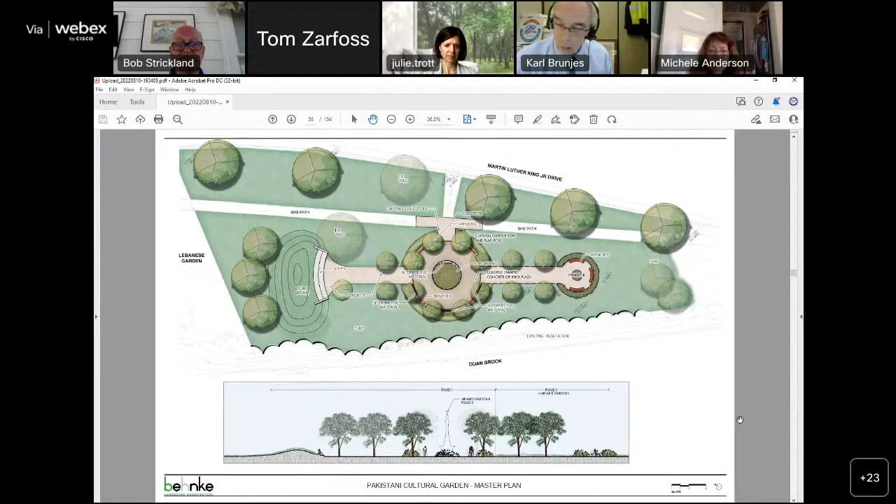That central plaza, the planting area in the center of it, is eventually the pedestal for a replica of the Minar-e-Pakistan, which we showed you last time. We're not prepared to do that at this time, but hopefully that will come in the future. Next slide.

That's just a quick look at the area of the garden. There's relatively little we have to do in the way of site preparation. As I noted, we're not taking out a lot of vegetation. One more. Okay, next slide.

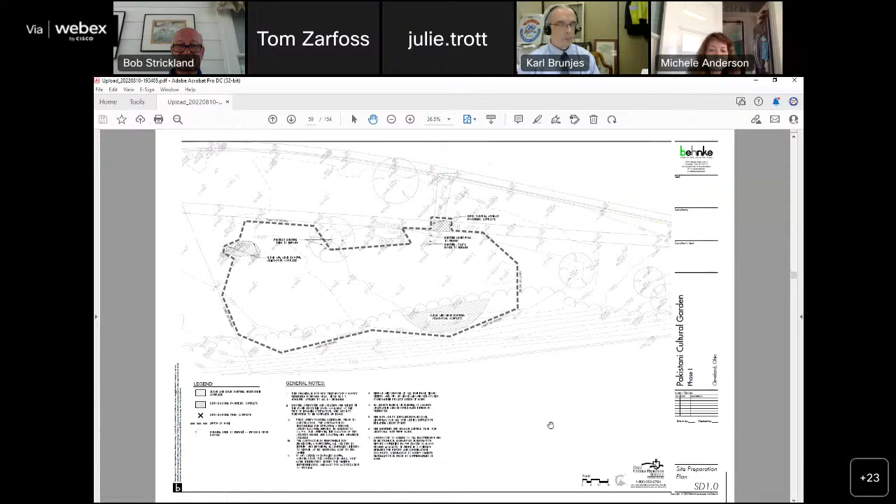That's our phase 1 program, the central plaza and the area that goes to the left, or the south, to the small amphitheater. The future site for the Minar will, in the short term, be a planting bed.

The plaza itself is concrete, two types of concrete. The star you see is again a replica of the setting for the Minar in Pakistan. That's going to be a colored stamped concrete. The remaining concrete will not be colored. It'll be scored on a 2-foot pattern and etched to expose a little bit of aggregate to give it an interesting surface. You can see there are some benches included around the plaza, and some interpretive materials which I'll show you in a second.

Next slide. The grading plan is not something that is much of a deal here. This is a flat site. It all slopes very slightly toward the brook. We're not putting in enough pavement that we're going to have a runoff issue. We have enough of a buffer between ourselves and the brook that it's not an issue.

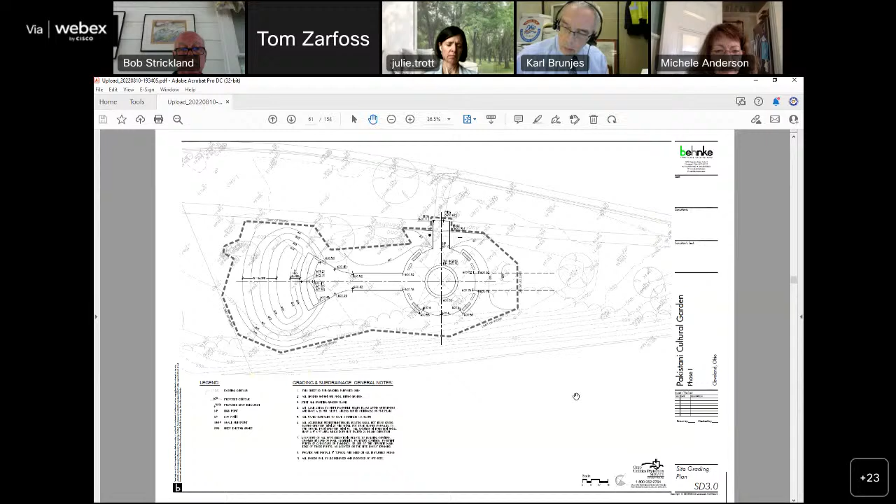I do want to call your attention to our entry. There'll be a garden sign and a flagpole. Those are provided by the Holden Parks Trust. Next slide.

Planting plan. Trying to keep this reasonably simple in that we don't want to create a big maintenance issue. As you probably know, the city's responsibility for maintenance is mowing the grass. That's it. The rest of the maintenance is the responsibility of the garden and their committee and the folks that assist with the work. So we're trying to keep this attractive but reasonably simple. There unfortunately have been some problems with plant stealing in the cultural gardens that we're going to have to try to deal with.

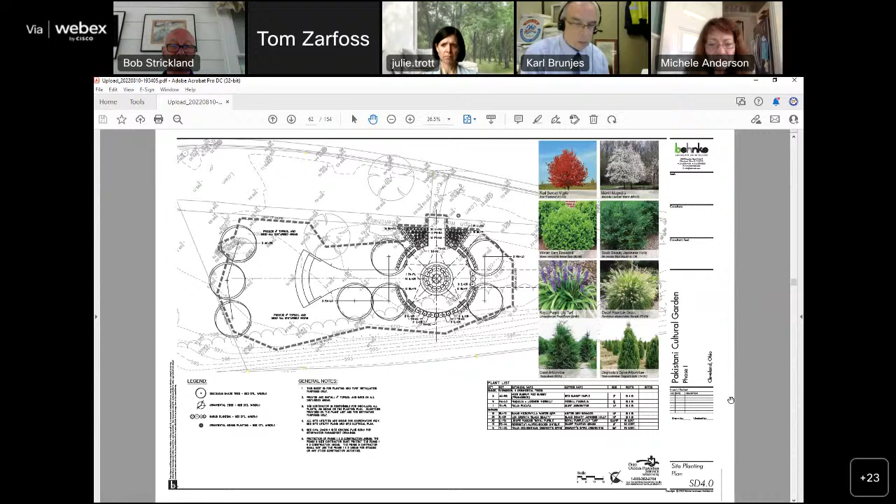So it's simple material, attractive material. Next slide. Construction details. The lower left-hand corner is that future pedestal for the Minar. In the interim, that'll be a seat wall with some planting behind it, and then eventually we'll put a concrete cap on that and install the Minar. Next slide.

That's a sample of the type of pavement we want to use for the star. We're still looking at colors, but it'll probably be something in that range. Next, please.

The same artist we're using for the Minar, we're going to use for our interpretive materials. The Minar will be stainless steel. These are stainless steel with, as you can see, some artwork on it reflective of the culture of Pakistan. There'll be 4 of these. Each will have a separate topic. They will also have a QR code, to use some of the technology that almost everybody has available to them these days, and not try to write long dissertations on interpretive material. Keep it simple, give people the general idea, and people that are interested can easily find a lot more information. Next slide.

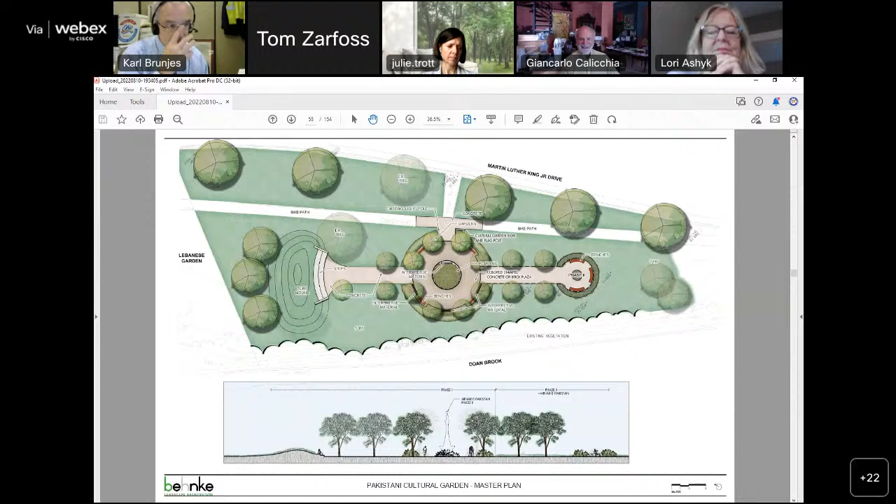Okay, and then what about some trees, some distinctive elements that make this a recognizable Pakistani garden? Well, I don't think any Americans would recognize a Pakistani tree, to be honest, and mulberries are not something I'd want to incorporate. Again, I think we have to use our interpretive material creatively and instructionally to tell people about the country that way. We just did a Colombian garden master plan, and we had some of the same issues there—you have to recognize that some things you just can't transport and have them be meaningful to people.

And that plant material also is just not available. But it is—I have it here in my garden, and I purchased it from nurseries in Oregon, California, and Washington. I can suggest something. What is it you have? Tell me. I have a Pakistani mulberry tree, which is one of the most beautiful plants in the world. Okay, well, we can look into that. We could always change a tree or two.

That's not a problem, but to me it's like we need to distinguish them from others. You mentioned the Colombian garden—I have the same issues with that. I like to see something that identifies these beautiful gardens for the culture they represent and come from, so that when Pakistanis have events in this garden, they see it as an extension of their home and environment, what they left behind and what they're creating for America and the people in Cleveland. That's especially important since this community of cultural gardens in Cleveland has become world famous.

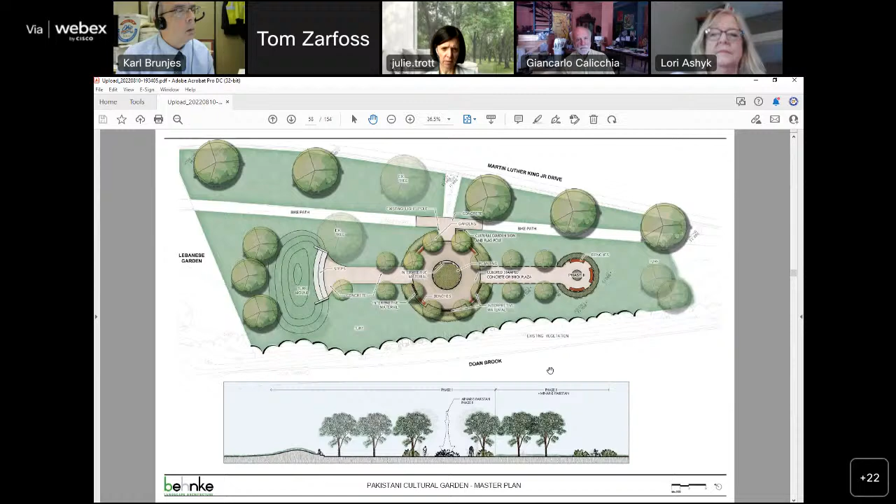Just a quick design question, Mr. Zarfoss. In the colored drawing, it looks like your benches are on the same concrete material as the center circle, where in the more detailed drawings it steps around the benches and interpretive materials. Which direction are you going? The construction drawing, if you go down a couple more, right there, that's the direction we're going.

My only comment would be that it might make sense to complete the right-hand side of the outer circle, so you don't have the little bite in that area, since you're not fully aware of when phase two would go forward. I think that might look a bit more complete, in my opinion. Or change the edging around the two right extensions of the concrete around the bench and interpretive sign, so it feels similar to your color drawing.

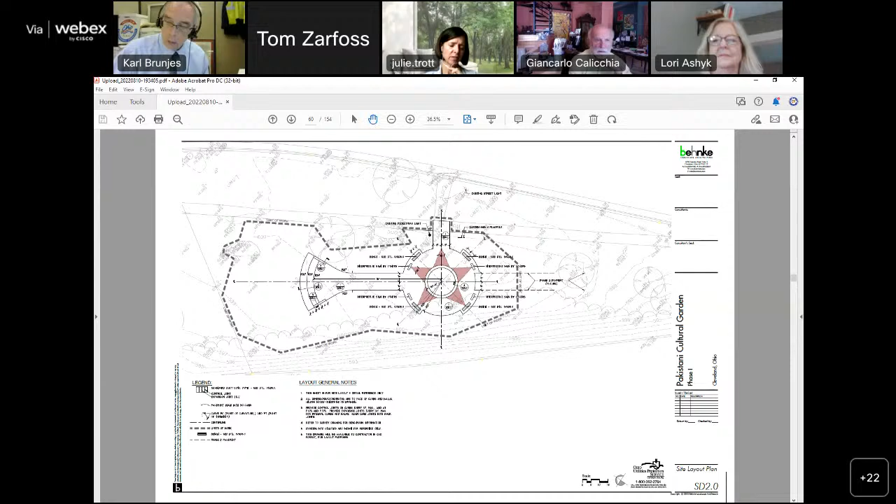I would ask for some consideration, obviously this takes a lot of fundraising, but to consider in your phase two—remind me of the bench material, I'm sorry I missed that when you presented earlier. The bench material, go to the last picture, that's the bench. Oops, I'm zoomed in, that's probably why. There, that's the bench.

Could this be an opportunity to incorporate some of that indigenous marble in a delicate way? It would probably need to be a backless bench, but providing something within the space that, if somebody saw the marble, they would connect to, based on it being something from that region. Even a stone bench, made out of marble, so that people could connect to that. We could take a look at that.

I was trying to do something a little more comfortable than a stone or concrete bench. But yeah, we could take a look. People have been sitting on stone benches for a million years. Yeah, oh, I know they have. Yeah.

So I would recommend considering that for your phase two so it does provide that connection to the location. If we could get marble or indigenous stone within our budget for that little amphitheater, which is concrete steps, it would be quite nice to have that be upgraded.

I can recommend a few of them, and you can get one of your Pakistani associates to donate it. It could be an extension of the budget instead of a part of the budget. I will raise that point. Hey Giancarlo, maybe you can have an offline conversation with Mr. Zarfoss with some recommendations of who we should talk to, since you do have some amazing connections. Yes, thank you. Thank you.

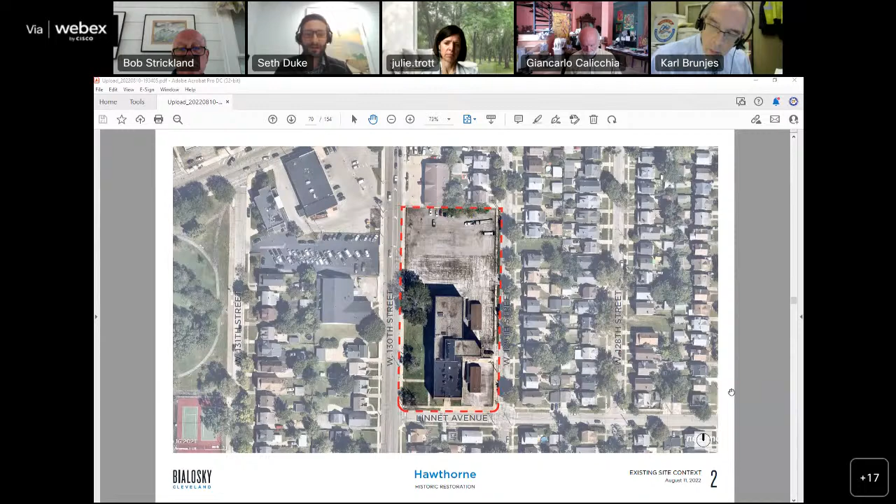Let's go to the next slide. Just a little bit of site context. From Lorain Avenue, it's just a couple blocks away, very car oriented, coming up West 130th to Lorain, mostly commercial, a lot of parking. And then on the next slide, you can see that Jefferson Park, as I mentioned, is just a few blocks away. So while we will have some outdoor space on site that's open to the public and available for residents, really there's this larger park for more active uses such as tennis or playgrounds, etc., compared to what we have on our site.

Next slide. And then this is just the front elevation, existing conditions. I did want to point out that we took a recent site walk with our historic consultant and a restoration contractor to evaluate all the masonry and stone. It's in remarkably good shape, so we'll have very minimal repairs to do. There are some critical areas, but overall just some tuck pointing and cleaning for the most part.

One thing to point out that you'll see in the drawings is the gray box on the left. That is an existing entrance that we'll be reusing as our new accessible point of entry. The one real change we're making to the fenestration is the very small windows at the bottom level in the center, which we are widening to match the proportions of the windows above. We'll be retaining the stone headers and working through that with our structural engineer, and the National Park Service is aware that we are changing those openings.

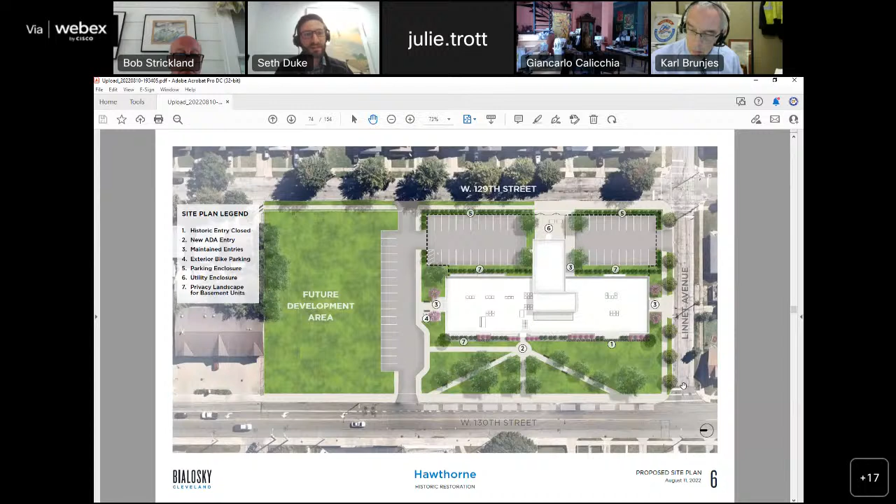One thing that's not shown in the site plan that I would point out is that we had a comment from the local design review and we're working on revising it: creating where number 6 is, the utility area, making that a little bit smaller and providing a pedestrian connection between both parking lots so that regardless of which parking lot you're in as a resident, you have direct access to the building without having to leave the secure lot and go to another entrance. So you'll be able to use that east entrance stairwell at the southeast parking lot, even if you're parked at the northeast parking lot.

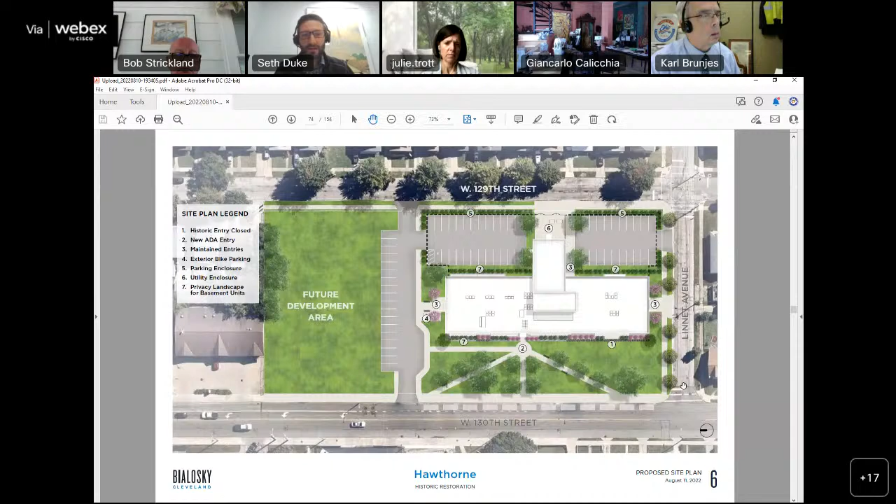Let's go to the next slide for a bit more detail on landscaping. This is our preliminary plan from our landscape architect. The base approach adds plenty of shade trees in the front lawn so people can use it as a relaxing lawn area for picnics, frisbee, and just enjoying the space. Then there's more dense shrubbery in front of the building and between the parking and the building to provide privacy and a buffer, while still allowing light and air into the lower level windows in particular.

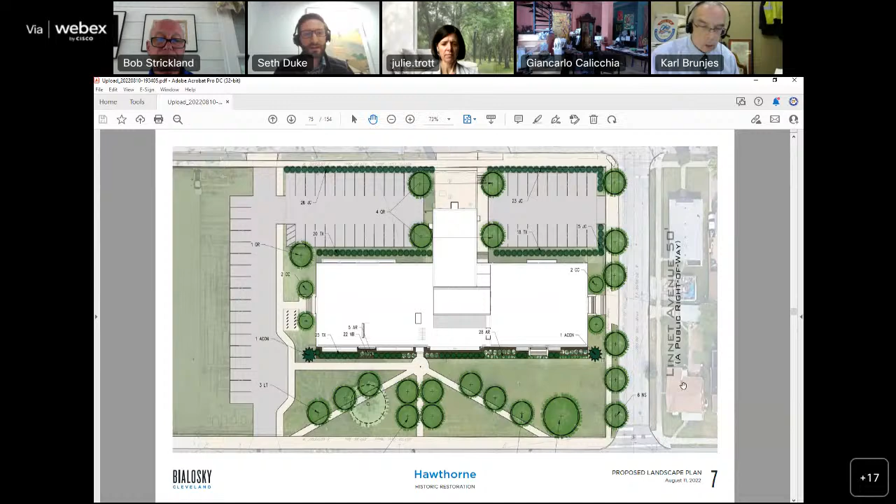We did have some comments from design review from the city's landscape architect about species, but our landscape architect is aware of those and believes the specific species of plants are adequate and appropriate for the site. You can see those species on the next slide. We have a number of trees, both on the front lawn and at the entrances, including some new tree lawn trees.

And then some denser shrubbery around the building to provide that privacy screening. If we go to the next slide, we added these next couple slides to provide a little more clarity on the entrances to the building and the circulation. It's a little bit of an odd building from an elevation and grading standpoint.

The building doesn't really have a direct entrance to any of the floors aside from the new one we're creating on West 130th. All of the stairwells come in at a midpoint between the lower level and the first floor, so you have to go up or down regardless of where you are. Being a school building, it had a number of entrances well beyond what is adequate and necessary for the new residential use.

So we're maintaining all of the entrances of the stairwells. We are maintaining and improving the entrance off West 130th for accessibility. And we're maintaining a rear entrance from the parking and utility area that goes directly into the utility space in the basement. There are three entrances that we are no longer using.

One, in fact, has already been closed up many years ago, filled in with a concrete floor. That's the one on the east elevation at the south end of the building. Then there's another entrance from the southeast parking lot to the east wing that went directly into the auditorium on the first floor, and that is now one large unit.

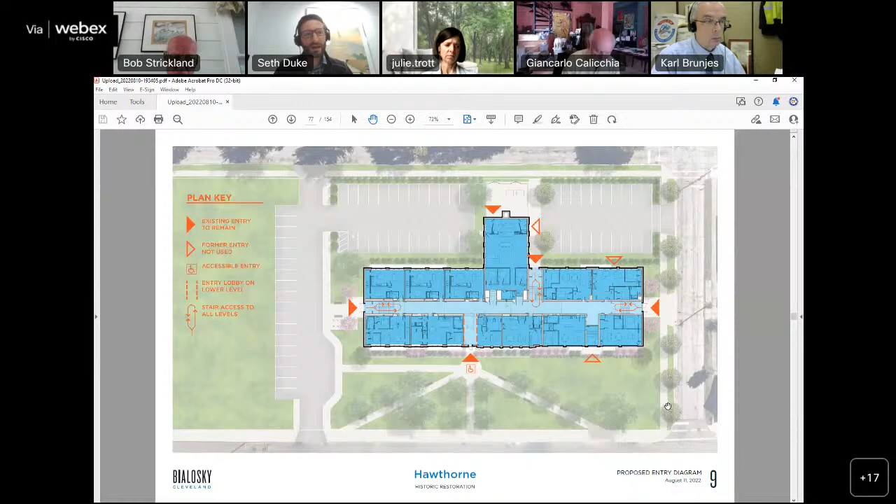If we go to the next image, it's more of what I just talked about, but it shows a little bit of that split level access. You can come in any of the stairwells to get to any of the floors, including, if you have the penthouse unit, you'll see in the floor plans you can come in off that rear stairwell.

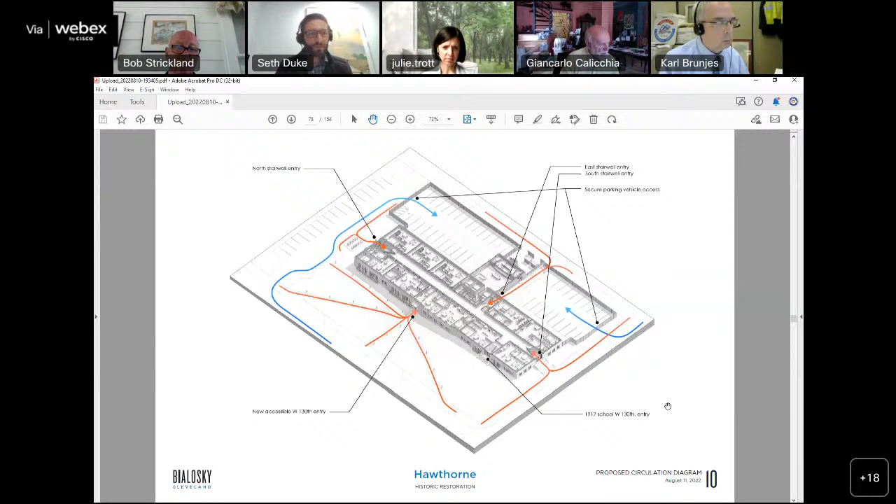If you are a visitor to the site, we're really directing you via the landscaping and sidewalks to that new accessible entrance, which will have a canopy and landscaping, and through color of the fenestration, which we'll see in some of the illustrated views, that is the primary entrance on West 130th. Automobile traffic will have access to those two secure lots, either via Linnet on the south or the new drive on the north side of the building.

And I think we just have our floor plans. Won't linger on these too much. I believe we covered them in some detail last time, but as a general approach to the building, we're preserving many of the historic finishes on the interior.

So hardwood floors in the classrooms, tile corridors, plaster ceilings, plaster walls in most cases. Chalkboards on the walls are being maintained. In most cases we're leaving them completely exposed, and in other cases, due to plumbing and electrical, we'll be furring over them, but they will still be there in case a future owner wants to bring them back. On the basement, we have our accessible entrance, as I mentioned, and then some utility space in the central area.

Going up to the first floor, which is the next slide, is that auditorium I mentioned, a large space with a stage area that will have the kitchen for the unit. Directly adjacent is that bathroom I mentioned, which is why we're closing off access to that door. But we'll still have the three main stairwell entrances for direct access to the first floor.

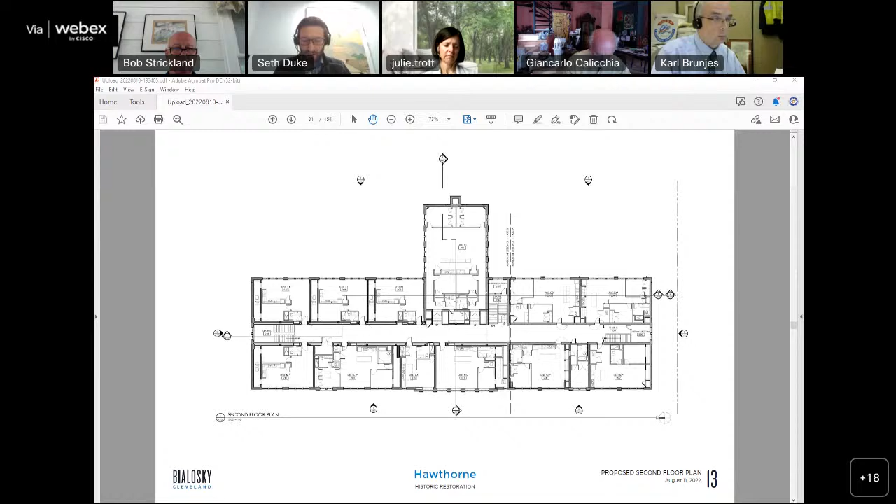And then I believe we have our elevations next. I'll go through the penthouse first, my apologies. So we do have a penthouse unit, with direct access via the east stair. That'll be a small two-bedroom unit. We're rebuilding the windows, fixing the masonry sills. There are a couple of mechanical louvers on the rear that will be changing to window openings to provide some additional light. And then there'll be a private deck with some combination of planters and railings to prevent access to the rest of the roof from that patio.

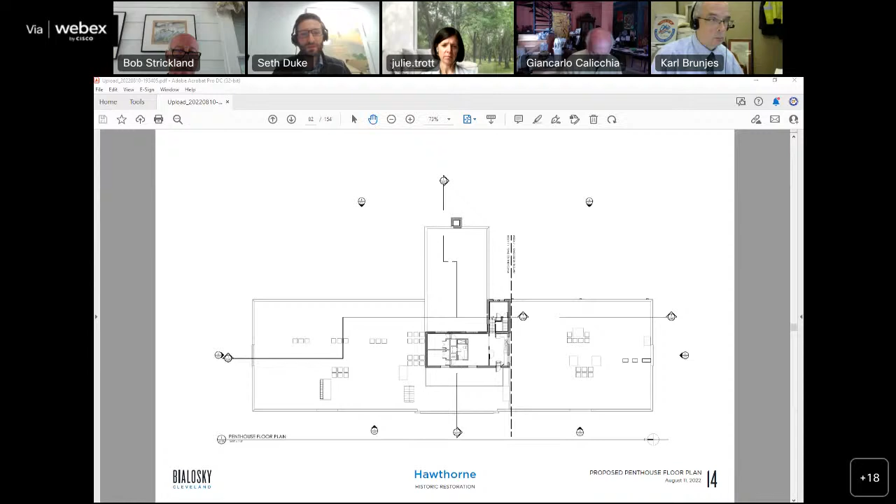And then on the elevations, I can run through these relatively quickly so that we can go to the rendered elevations. If we go to the next image, as I mentioned, masonry and stone are in great shape. We have a little bit of repairs at the entrances where the stone has been weathered and damaged over the years, so we'll be patching those in, doing some Dutchman repairs for some bigger openings before we put in the new entrances. But we are restoring the windows based on the historic drawings and existing conditions we have on site, and bringing back the transoms above the entrances to match the historic configurations.

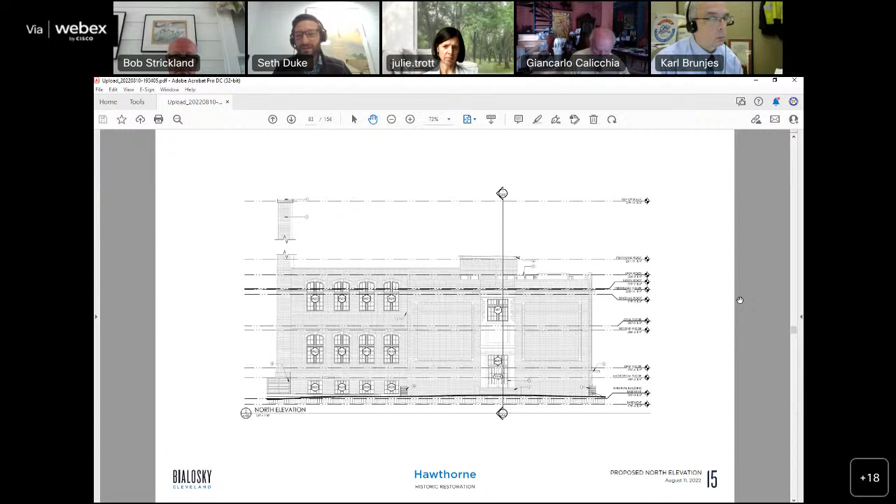If we go through, I believe the next is the south elevation. You can see it's very similar. You can see that door that leads directly to the auditorium on the right. That'll be behind the secured parking, so even though we're fixing it shut, it's also not something that's going to be visible to the public right away necessarily. It'll be in that secured parking area.

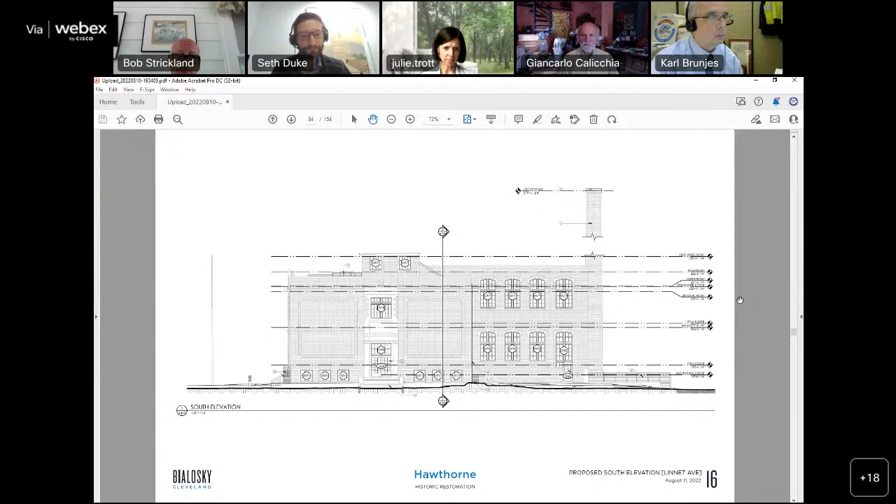And if we continue around the building, on the rear we have those light wells that'll have some guards around them for fall protection. We're likely rebuilding most of those based on the conditions, but we'll be able to reuse the stone caps for those light wells, as those have maintained their condition very well. And then that door in the rear that goes to the utility area. Thanks, Don.

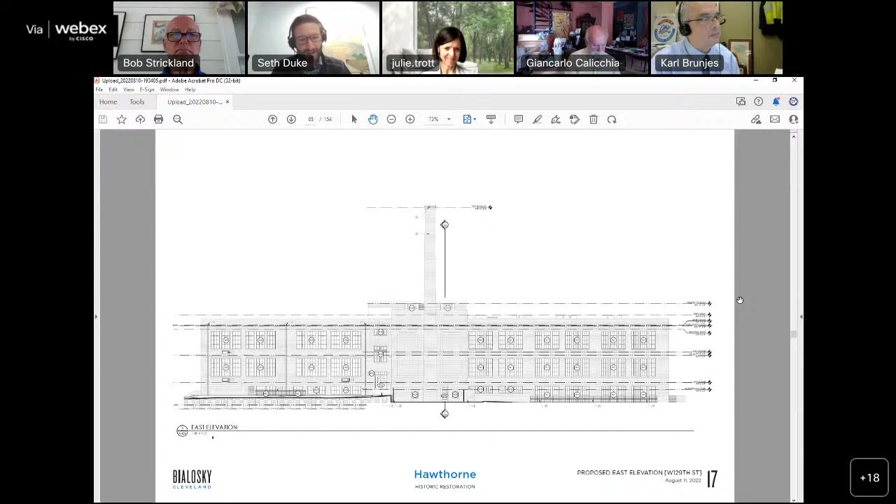And then the front elevation on the next slide, there we go. You can see the accessible entrance on the left. We have a blow up of that in just a couple slides. The former entrance we're basically treating as a large window on the right; the doors will be opaque. There'll be a painted drywall partition behind, and then the transom will remain open to provide additional natural light to the unit beyond. Due to the floor levels and the split level nature, that transom will be up high, so you won't really see into the unit—it'll be up near the ceiling, providing light while still providing privacy.

And then there are those windows at the center that we're widening for the basement units.

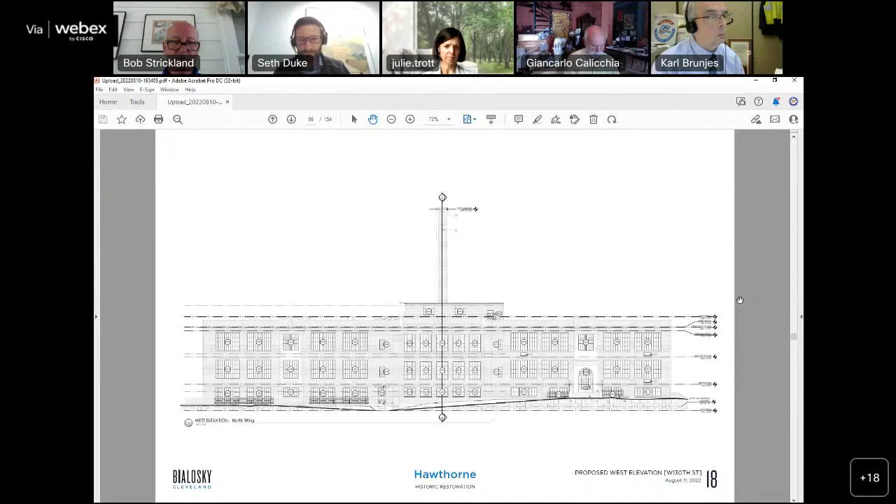On the next slide we have these rendered so you can get an idea of what we're doing. There'll be guardrails in front of the light wells, and shrubs that provide some additional privacy in front of those.

For the windows, we're looking at a color to really lean into the existing stone on the building, which I believe we have a swatch for later. We're looking at physical samples now to really get that color dialed in.

The operable entrances, the accessible entrance and the doors to the stairwell, will be a bronze color, with the transoms above also bronze, providing a visual cue that this is the way in and out of the building. There's one on each facade, so there aren't competing entrances, and it's very clear which one to use. The door we're fixing shut on the right will be the same color as the windows, a subliminal visual cue distinguishing windows from doors to help guide people in and out.

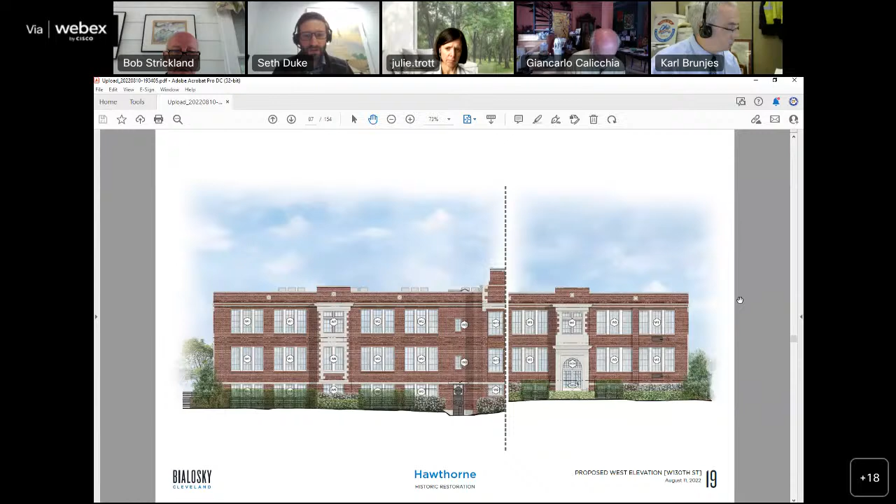Next we have an enlarged blow-up of both entrances. There'll be a canopy above the new accessible entrance with an integral light, so you won't see the fixture, plus site lighting with bollards along the path and poles at the parking lot. Landscaping will guide you to that entrance, while the other door continues the landscaping in front of the stone steps, keeping the colors consistent with the windows.

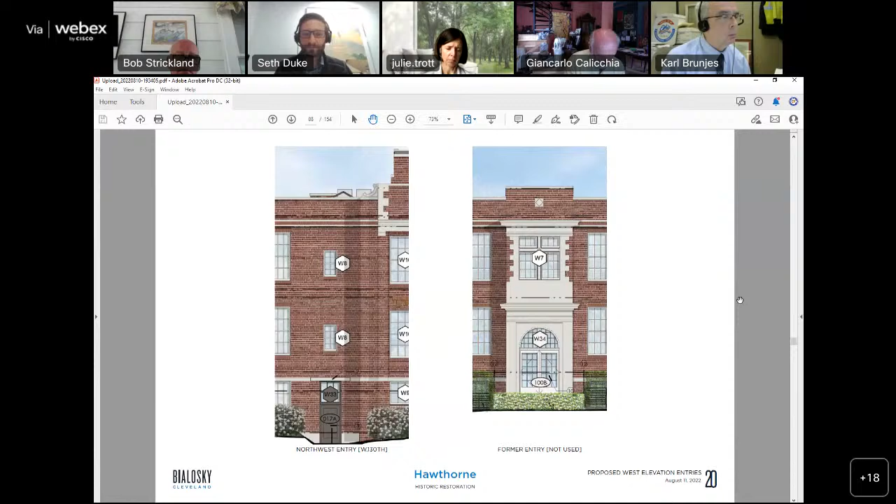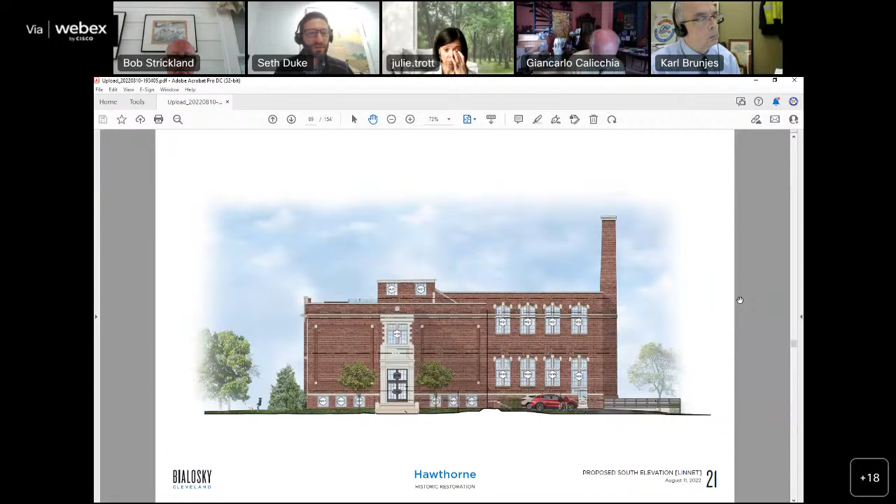The next slides show rendered elevations of the other facades, similar to the front: bronze color for the active entrances, and matching window color for the door that formerly went into the auditorium. Then there's an enlargement of those entrances on the other side, followed by a bit more detail.

We're looking at Traco, owned by Kawneer, for the windows—aluminum windows typically used for historic tax credit projects. We're looking at a sandstone color, and we've actually started examining physical aluminum chips to get a better match—a very light buff color corresponding to the existing stone on the building—whereas the entrances will be a darker bronze color.

We also have the historic drawings, very detailed, for the later 1927 addition to the building, so we have a good idea of overall dimensions and placement within the wall, allowing us to match the proportions correctly to the historic building.

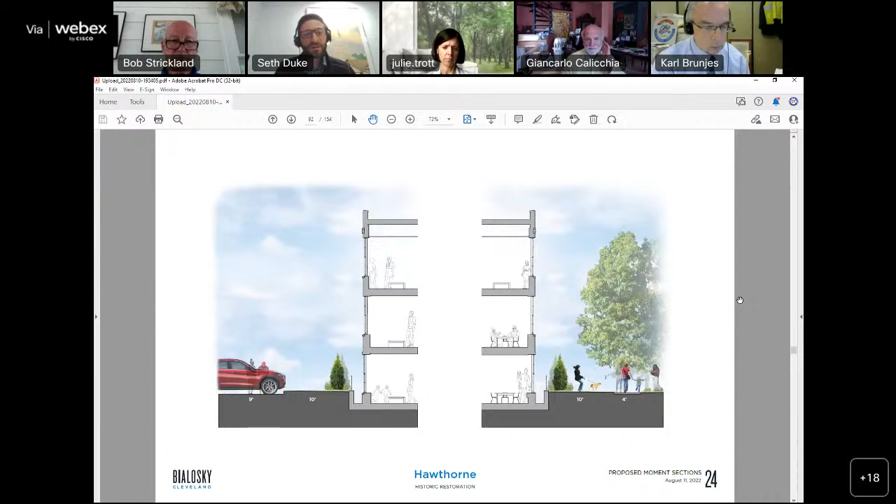Trash and recycling cans will be in public areas—at the entrance off the drive aisle and along the sidewalks leading to the accessible entry—so people using the outdoor space can throw away trash and recycling. There will be simple black hoop bike racks for outdoor bike parking, with indoor bike parking for residents in the building, plus simple black school park-esque benches. Site lighting is still being worked through, but it'll be simple black light poles and light bollards along the pathways.

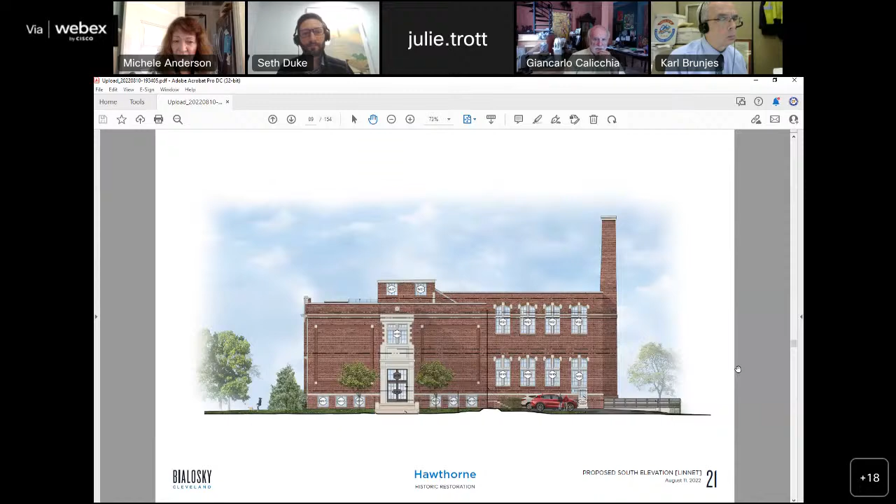Okay, and on the east side of the building, facing that parking lot, you're going to have some plantings there so that they screen the windows for the units on the lower level there. Yes, on both sides of the building. So both, on the West 130th side as well as between the parking and the building. And I just wanted to make sure that the plantings along that parking lot area are like an evergreen that's dense enough so that in the winter, there won't be headlights shining into people's units.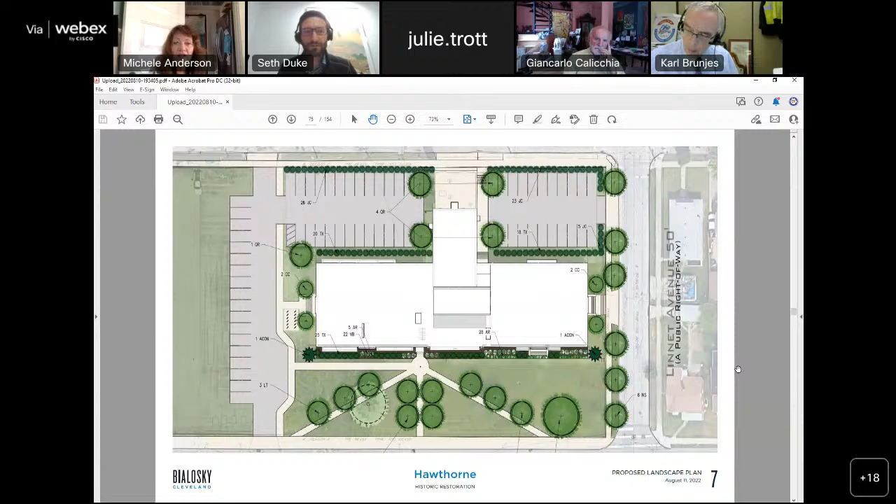Right. And I believe, Don, if you go to the next slide that shows the species, it's that Taxus Hicksii that is going to be the primary screening in front of those areas. Okay, well, thank you very much. Those were my questions, and I fully support this.

Thank you. Oopsie. Director Wong?

Good morning, everyone. First of all, knowing the work that SCA and Bialosky do, their work is always excellent and thoughtful, so I'm very supportive of the effort. On behalf of the city, it's really wonderful to see a school site that has gone through our city RFP process be restored and reused, as school sites are often very difficult. I hope this is an example moving forward of how school reuse sites, as well as our RFP process, often run through community development, could be a great example to guide other developers. Very, very happy and supportive of this. Thank you.

Thank you, Director Wong. Other questions or comments, or would someone like to put forward a motion? Giancarlo? This is Director Huang. I am putting in a motion to approve the project as presented.

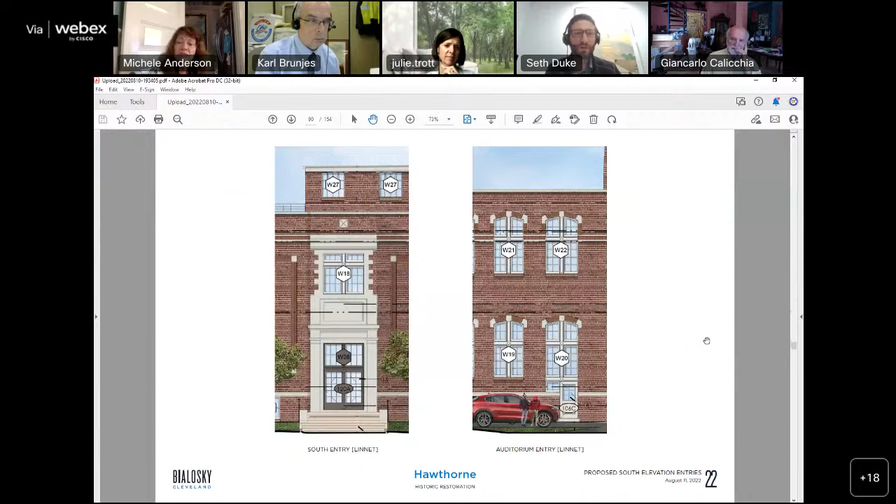Yes, the chimney will be preserved. The north, east, and south elevations are in relatively good shape, just need repointed. The west elevation of the chimney is where there were ladder runs that we'll be removing, and we'll be infilling with some replacement brick. It'll be sealed off, it won't be functional. We'll be capping it with a new roof to prevent water from getting down into the building. Okay, thank you.

Thank you, Mr. Calicchia. Any further questions or comments or discussion items? Not seeing any. Mr. Pettit, please call roll and announce the results.

Ms. Anderson, Yes. Mr. Calicchia, Yes. Mr. Dryer, Yes. Mr. Edmund. Director Wong, Yes. Mr. Strickland, Yes. Mr. Tarasuck, Yes. Ms. Trott, Yes. The motion passes unanimously.

Thank you. We look forward to seeing the restoration. Thank you. Thank you.

Now move on to our next applicant. Design review concept plan, sorry, concept plan located at 11101 Magnolia Drive. Addition and site renovations for the Magnolia Clubhouse.

Good morning. I'm Preston Buchtel, the architect on the project, and I'm also joined by representatives from Magnolia Clubhouse and the Kruger Group, which will be the contractors on the project and have been helping to develop this project, along with having a long history with Magnolia renovation work there, and actually the University Circle area with the neighboring Hawken schools.

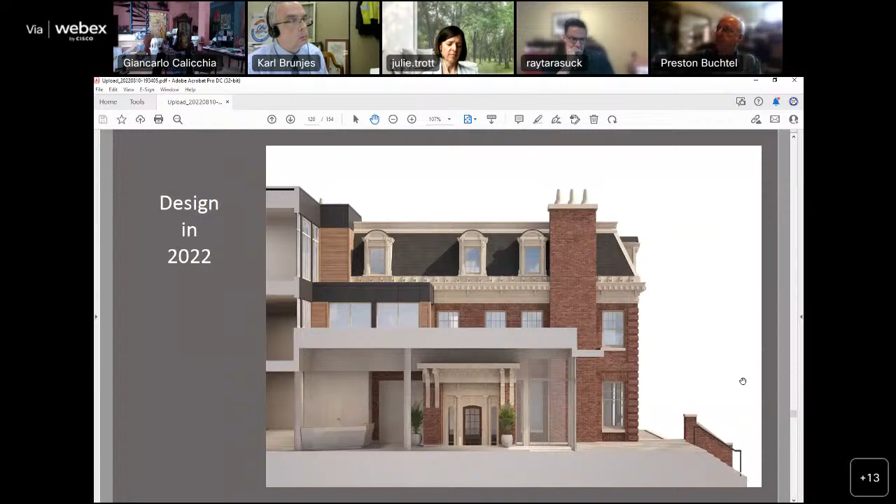Don, if you could go to, let me pull up my own drawing. If you can go to number 5 in the drawings presented. Actually, hold on a second. Just as I talk through this, if you could go back one, Don. This is the proposed addition, but as I talk through the drawings, the building on the right is the east house, and the building on the left is what is referred to as the west house. If you could go to page 5.

To give you a little background on the existing buildings, the east house, which you can see mostly on the right hand side in the middle and bottom corner, was designed by Frank Meade. I don't have an accurate date as to when it was built. Currently, the building is primarily used for the members and clients of Magnolia Clubhouse, involving programming such as eating facilities and a multimedia production facility on the 3rd floor.

The current building is primarily brick, as you can see, and actually has quite a lot of detail to it. It has wood cornice and moldings, and a very nice mansard roof.

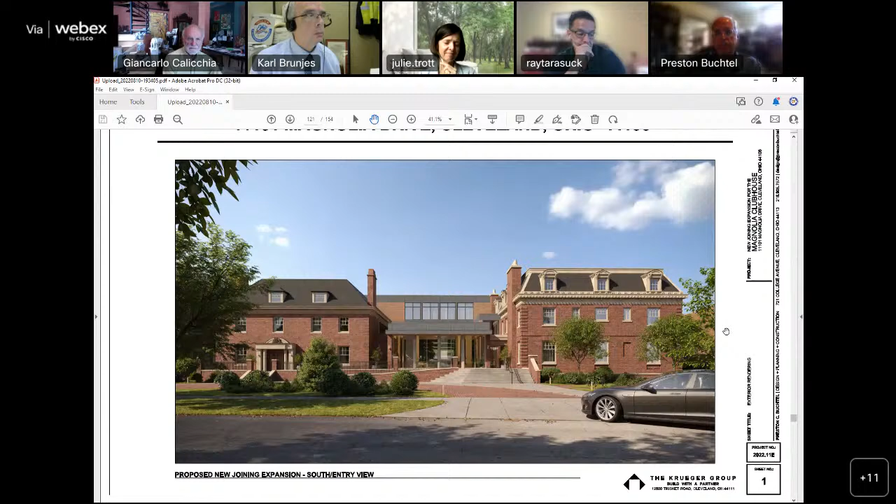Other feedback from the commission?

I think we're being a little shy today. So I guess what I have is, what you've received today is my feedback. Do you have any questions or comments related to that feedback?

Myself, are you asking, or? Yes, you. Well, no, that sounds good. We, one of our goals, obviously, we're looking at a conceptual review here.

We wanted to get feedback to see if we're heading in the right direction.

Part of this being that so that Magnolia can then finalize their fundraising to actually build this facility.

So, as some of you are familiar with, there was a previous design, and they obviously didn't want to present that if that's not what they're going to build.

So we're looking to get feedback to see if we're in the right direction. I take it from what you're saying, we're going in the right direction, and there's just some tweaks that we need to sort of try to address a little bit more.

I would say the comment that Don brought up about the stained glass—the glass is in the west house. It's on the side of the building.

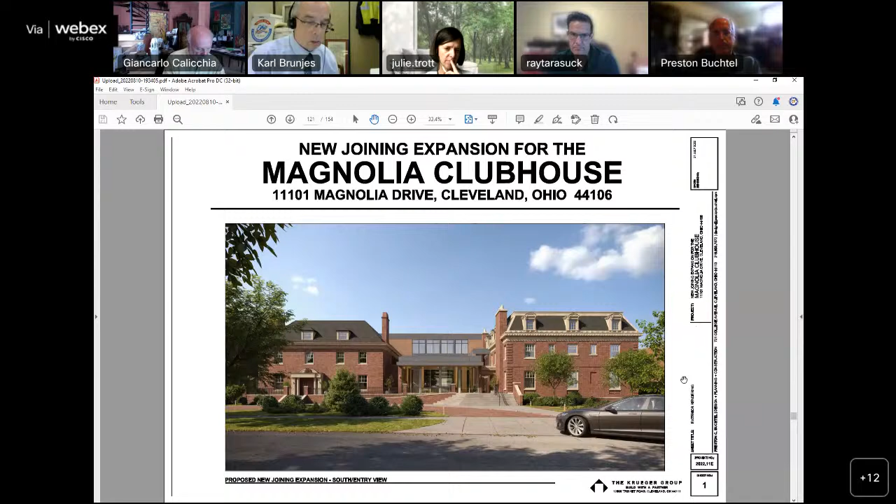Okay, that's helpful. One second, I'm sorry, I'm going to zoom in.

I think you have this, and maybe it was just deceiving in what I was looking at, that just aligning some of those spaces of the front elevation of that public common space and the west building, so that you're trying to extend those very traditional regimented aspects of the two buildings into this new addition. And then once again, I would keep at least 8 feet between the existing buildings and your central common area.

So that people can still appreciate the detailing of those existing buildings. The one thing we're trying to preserve, and you could see in that section of the common spaces interior-wise, we're trying to preserve as much of the brick as we can.

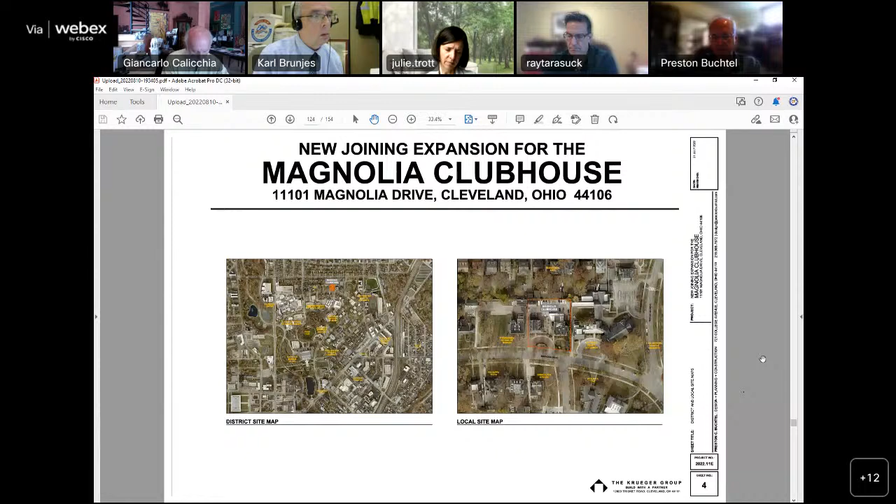And in fact, when the Kruger Group remodeled the existing buildings, they already put the sprinkler systems in. They haven't been hooked up yet until we do the final project. So what that allows us to do is now we don't have to get rid of the glass.

So in the west building to the back by the cafe, there's a very large window. It's probably originally a dining room, I'm guessing, in the original mansion. We would have had to, if I recall right, in the previous one, they were going to put glass block in place of it.

We don't have to remove that window at all. We can preserve it so that people from the west building in that space, which is the resale shop, can view into the common space and vice versa. So we're trying to preserve all those visual connections between the two and just have a sense of openness. So again, that common space, sort of trying to approach as best we can as a pavilion, a feeling of openness with just a roof over it between the two buildings.

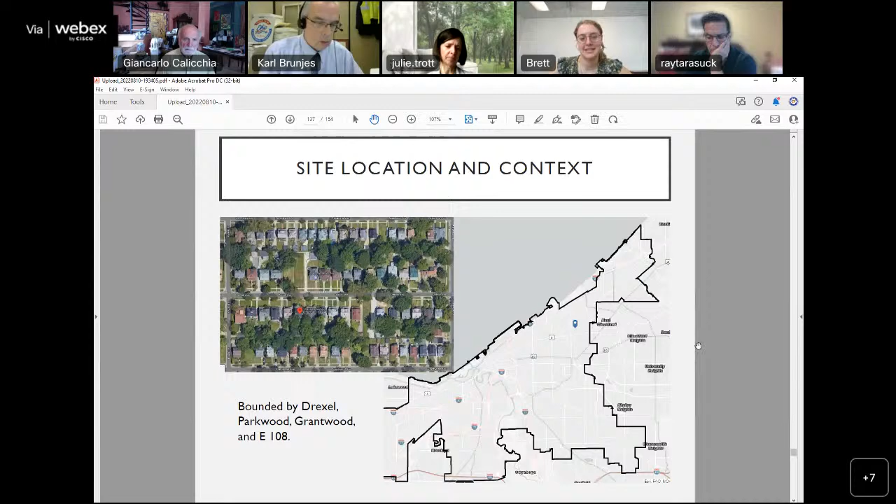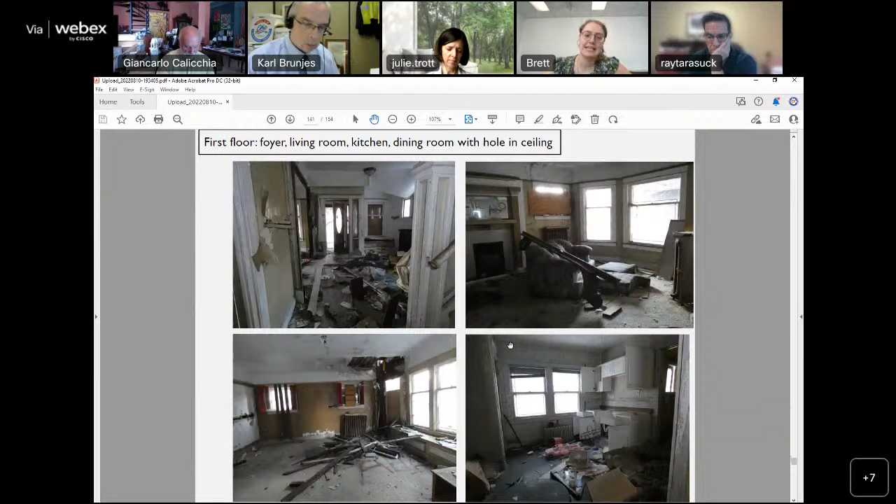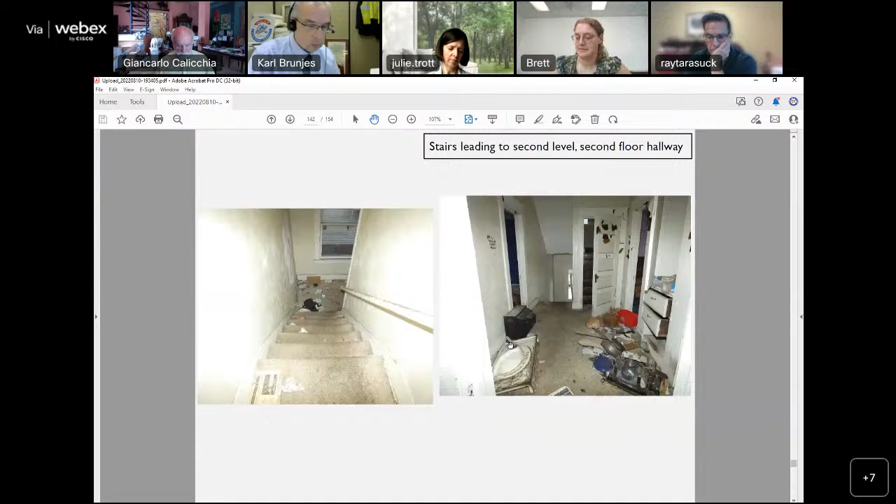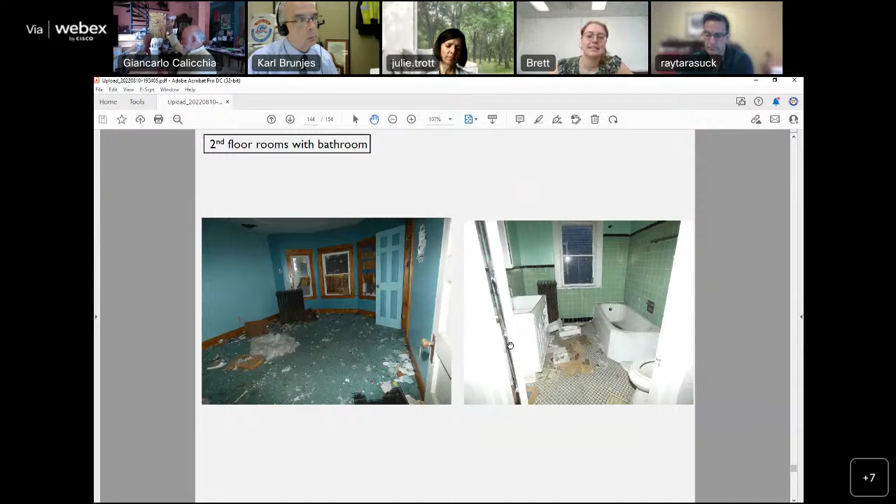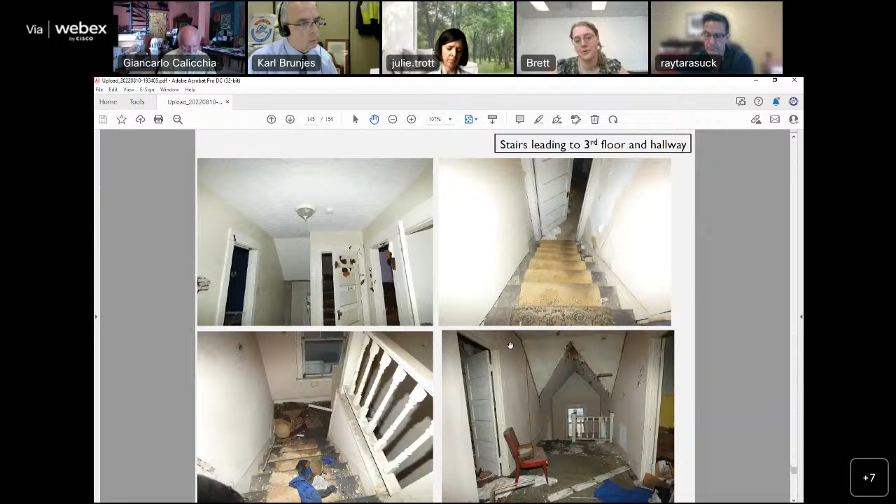Here are the stairs leading up to the third floor and just the hallway that is on that third floor.

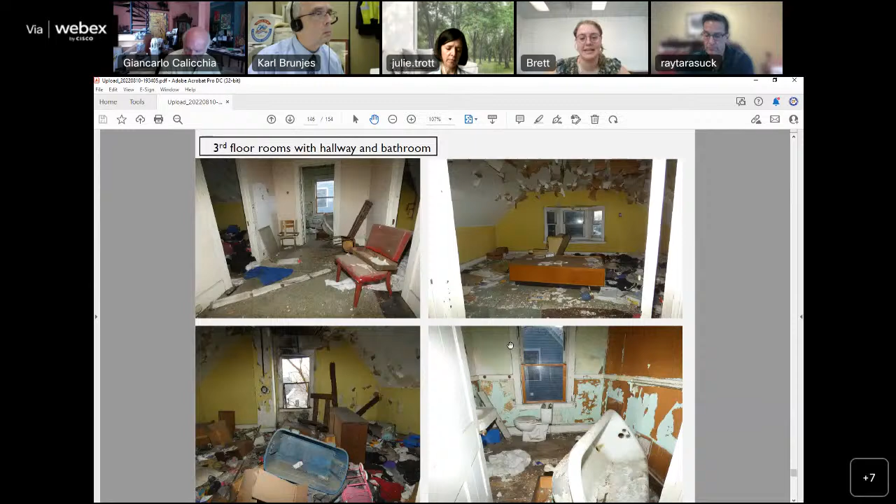Here is the room on the third floor, the hallways and the bathrooms. Again, you can just see a lot of chipped paint.

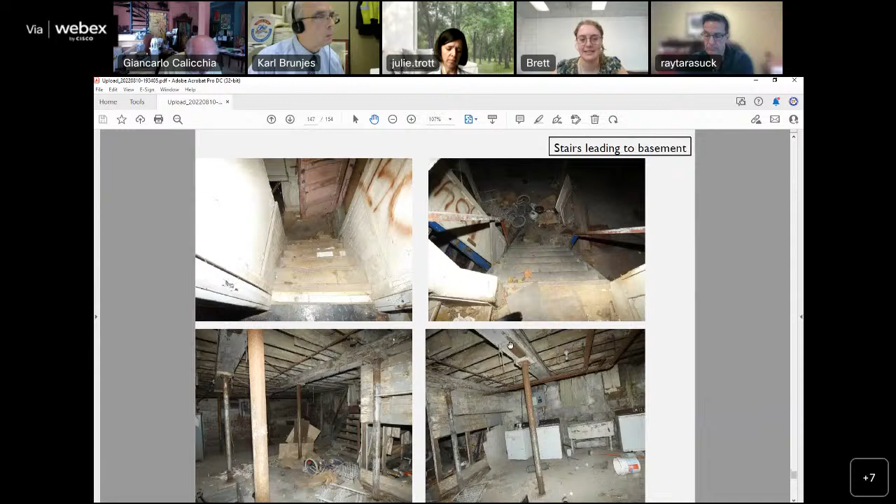Here are the stairs leading down to the basement and the basement of the structure.

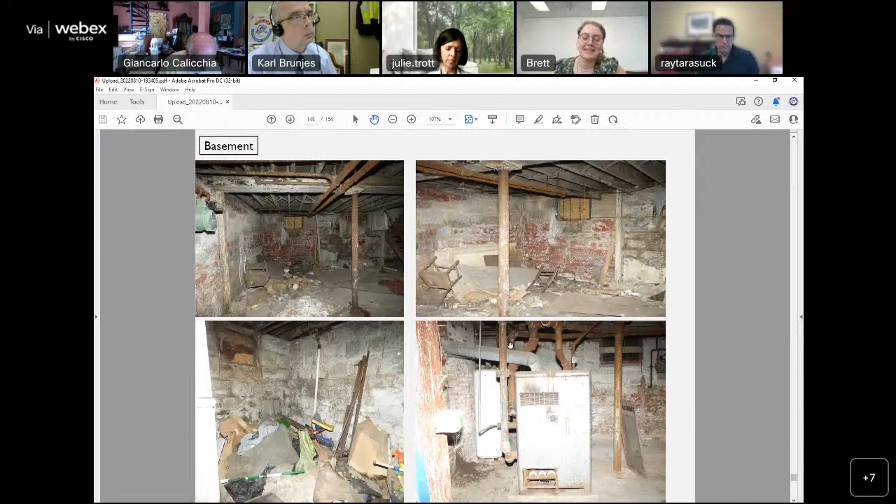Just more photos of the basement.

Obviously there's all the chipped paint, which could be a potential lead hazard, and contractors and people who have studied this house have found over 1,000 feet of asbestos pipe insulation that is throughout the walls, which is just important to note.

So the properties on either side of this house are in really good shape. They are kept up. Alex and I also visited this property last week, and one of the houses had a little child's play set that was sort of right next to the garage that was seeming pretty unstable. And so both houses on either side have young children.

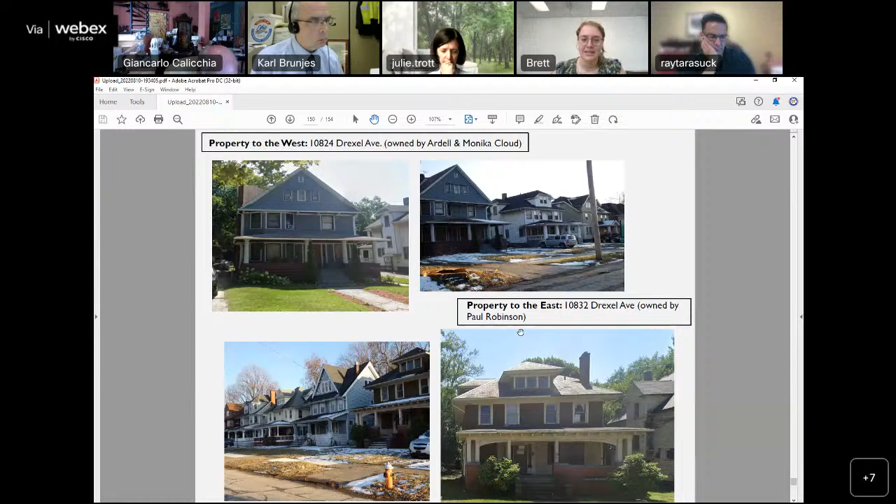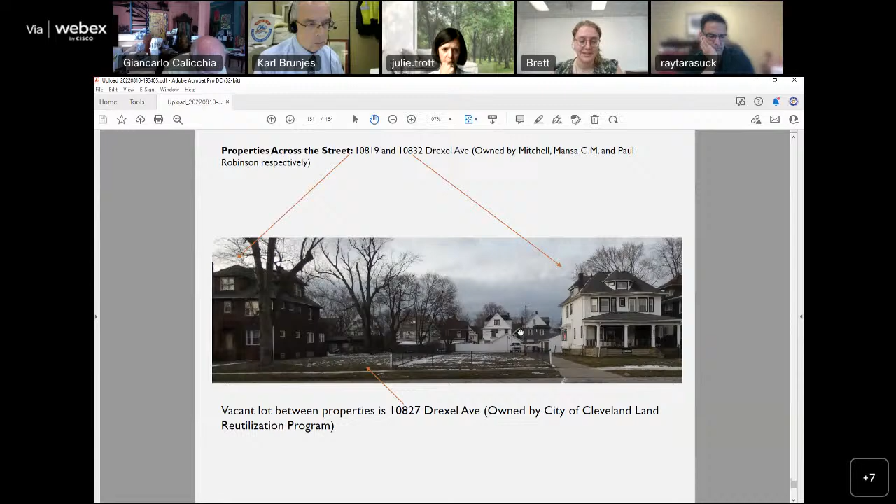The properties across the street are also well maintained. There are also 2 empty lots across the street that are always maintained and never cause much of an issue.

So then our site plan would just be to demolish this structure, remove all the foundation, level the site with clean backfill, topsoil, seed, and straw.

And obviously we understand demolition is not ideal and it's not necessarily our first choice, but it's important to think about the fact that this property has been vacant for 15 years. Sally Martin, our director, said that to rehab the house would probably cost between $200,000 and $300,000, and it will only exponentially get worse as it is so open to the elements.

We also just want to think about the neighbors who are living in the houses next to this property, a lot of whom have young children. These are people who have complained about this property, and we just want to be able to give them answers and help those people out as well. Thank you, that's all I have.

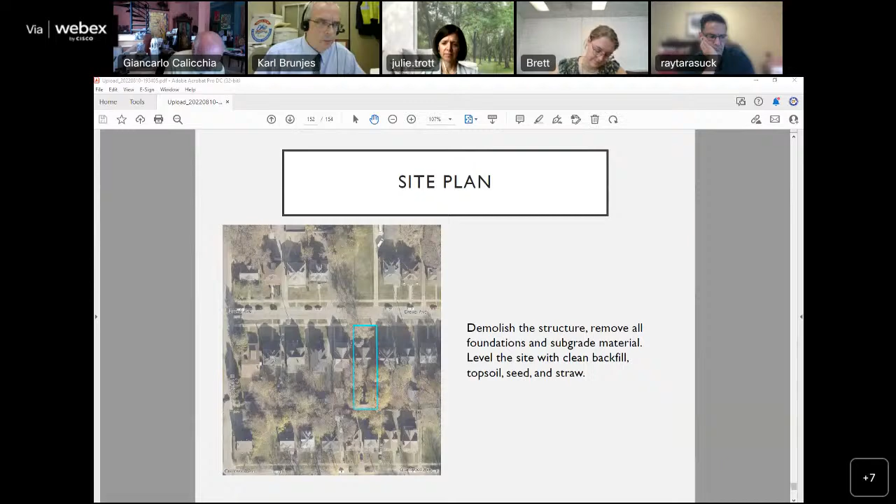There are a couple of major holes in the exterior walls, including that one. It was mostly concerning. It's not clear how that damage was done, whether it was in a storm or otherwise.

The basement seems dry, it seems like the foundation's solid. So the interior actually feels better than the exterior. The exterior is where all the issues are. There's some major holes in the exterior, including the roof, back by the rear chimney. There's evidence that people have been in the house.

So it's a mixed bag. It's always a difficult situation when we have to review houses in this kind of condition.

I did speak to one of the neighbors this morning. I spoke to Paul Robinson, who's developing the house to the east, which is the one to the left of this house. He's working with the Restoration Society on restoring that house. He supports the demolition. His major concern is that people are coming and going from the house. There's also some illegal dumping being done in the rear yard, and there's also animals and vermin around the house. So he's mostly concerned about the dumping and the strangers coming and going. So he supports the demolition.

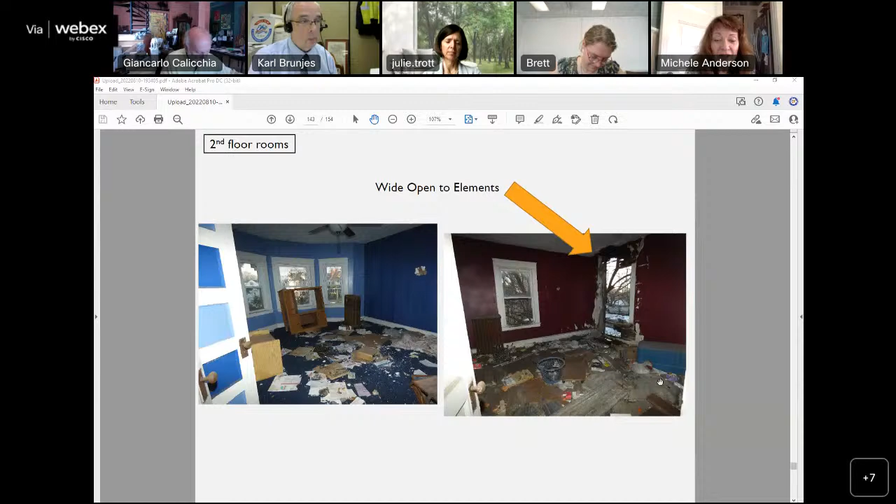Thank you, Madam Chair, and thank you for the presentation. This is so exasperating. It looks like a solid house with a lot of wonderful features. I mean, the sandstone porch, the interior still has a lot of, like beautiful doors, the fireplace mantles, the built-ins, the space, you have nice big rooms. And

I know there are models out there for channeling these type of houses into responsible rehabbers' hands. It's just, you wait 15 years and it gets to a level of decay where it makes it really, really hard to make the numbers work. But, and I brought this up before, the land bank could probably engage in the model that Detroit Shoreway used, where I think they used to get them donated by the bank or the land bank. And then the nonprofit entity would sell it to a vetted, responsible rehabber for like $5,000. And the $5,000 went to the nonprofit towards maintaining the program to continue cycling these homes into the hands of responsible owners.

There's got to be a way. We give out a lot of tax abatement. Is it possible to forgive the taxes, or foreclose on the taxes in an expedited fashion so these don't just sit here and rot? When I was looking this over, on this side of Drexel Avenue, on this entire block, everything else is intact. This would be the only missing tooth. And I hate to see that. It's just really frustrating. I mean, if this house was renovated, I'd want to live in it. I think it's a gorgeous house. But

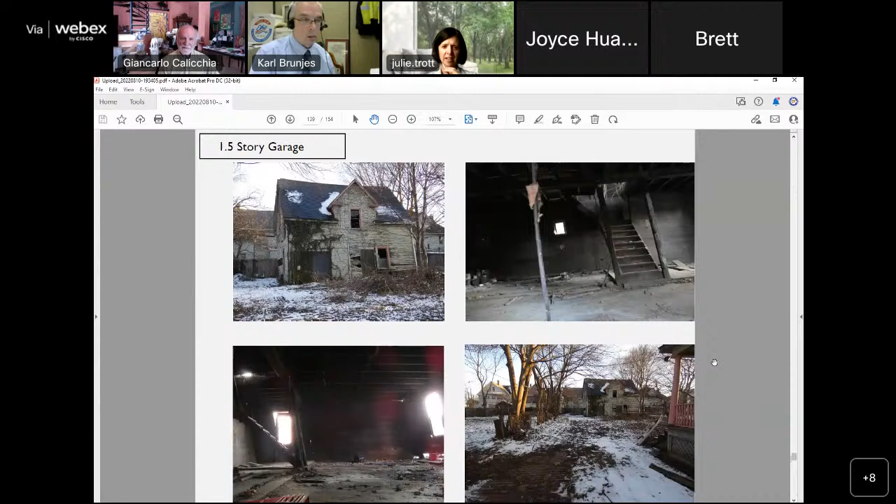Does that conclude our conceptual review, or do we have one more? Okay, so that concludes our conceptual reviews, and we'll move on to administrative reports.

Madam Chair, I'm not sure I have anything today. I would like to report that Emily Spezia Schwiff, our Ohio History Corps member, will be finishing up her work on August 22nd. She submitted her final survey report to the State Preservation Office, and she's just finishing up a couple of her National Register questionnaires. So she's essentially done with the project we hired her for. I just want to say thank you to her and wish her well in the future. In two weeks will be the end of year celebration in Columbus, where we'll give her an official send-off.

Excellent. Well, Emily, go ahead. No, go ahead. No, I was just going to say, Emily, thank you for all your hard work. I know it's greatly appreciated by Don and Karl, all the survey work that you do, and the work for the National Registry questionnaires that really benefit them tremendously. So that's all I was going to say. And good luck.